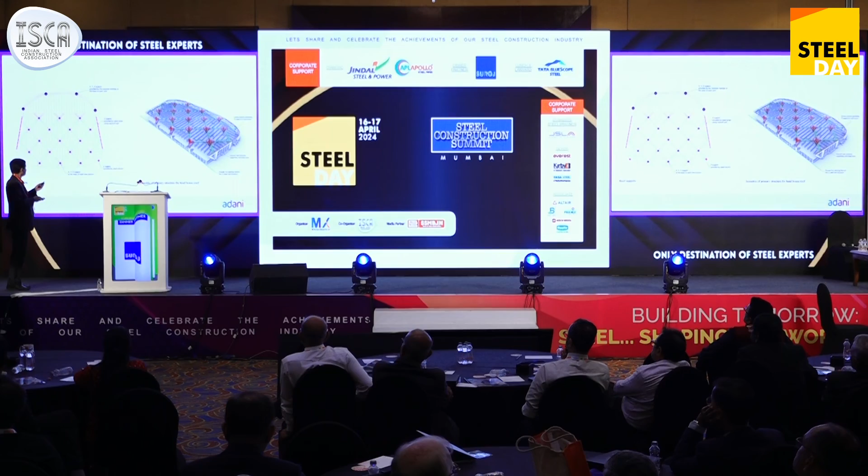Okay, so these are the columns coming from the terminal, and these trusses fly over and rest on the arches which are formed by these columns. Now as per Zaha's design, you will never know where the roof ends and where the column starts. It seamlessly turns down into columns. So these 4 arches, 3 arches, seamlessly flow down to the ground as columns to the mother earth to take the load, and they are sort of valley-shaped, finished columns.

So they take the rainwater also down along the valleys and drop them down to the gutters all around the terminal. And these columns, these trusses, this is the shape of that truss. Now this is what I called the Toblerone truss here.

The purpose behind this shape was we found out in the analysis that most of the time this truss was having downward bending. There was certain upward bending, but the compression created by upward bending reversal of wind was not as significant as the high compression caused by dead and live load and gravity loads in the top chord. So this shape was quite efficient. This section is almost equal to these 2 sections. So you can imagine the type of loading here.

Okay, this is that iconic image of the mega column that you will see when the structure is finished. This column is inspired by the lily or lotus, as you call it. When you stand here, you will be looking up as if you are looking at a lotus from below the pond. So that's the shape given by the architect.

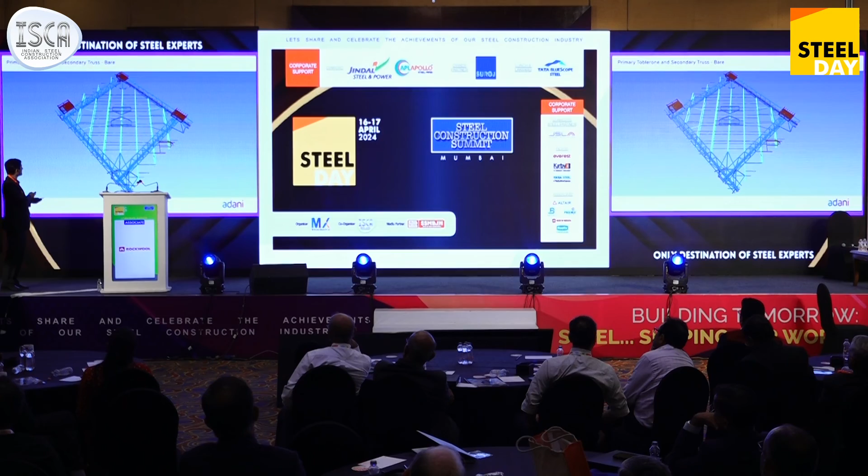This is a typical panel formed out of 4 pods plus 4 Toblerone trusses interspersed by straight, simple plain trusses and then purlins. These are some of the skylight arrangements here, but that's a secondary structure. Okay, this is that truss. Most of these trusses are made in tubular sections. These are the pods where they meet.

This is the slat ceiling arrangement. Now here the false ceiling is not opaque. It's completely permeable. There are metal slats going in twisted profiles. So with this slat ceiling, if you stand here, you can see the roof above between the slats. So all the ventilation takes place through the roof, and there are air extraction fans on top of the head of the mega columns.

Okay, so this is the interior. You can see the intricate maze of structure. This is right up to tertiary structure. These are the purlins which are given for suspending the tertiary structure of the slat ceiling, which a separate vendor will supply.

Okay, these are the arches that I was talking about. They just fall seamlessly down to the ground. So these trusses flying from the facade fly over this, rest on the arch and then cantilever out.

So this arch and this cantilever were proportioned in such a manner that the truss behind also got some relief because of the cantilever here, and this arch was not subjected to excessive torsion by its specific inclination. So Zaha, Arup and L&T did a lot of work to exactly position this arch so that it's self-stabilizing. Okay, this is that arch. And these are the massive foundations here.

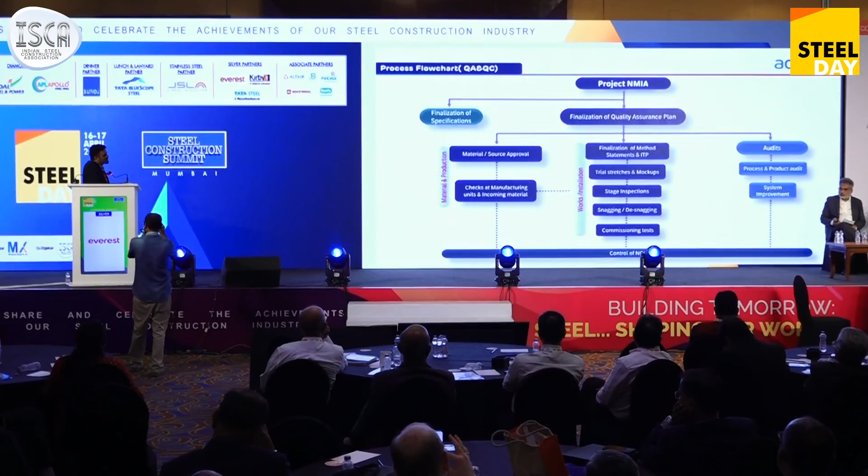Good evening, everybody. I will take you through the QAQC processes adopted for this head house roof as well as the construction sequencing. In the Navi Mumbai International Airport, for all the sub-projects we implement, we follow this process flow chart. These are basically the QAQC processes which are implemented in the various stages of the project. After finalization of the specifications, the source approval will happen for the materials. Once the materials are approved, checks will happen both at the manufacturing units as well as on the incoming material at the site.

Prior to start of any activity, method statements and inspection test plans are finalized. Then we will be having site mock-ups as well as benchmarks. Benchmark is basically the detailing of that particular member, interaction with other services and other things. So we carry both. Once those are approved, then the installation will happen for all the works. Those are monitored by the stage inspections.

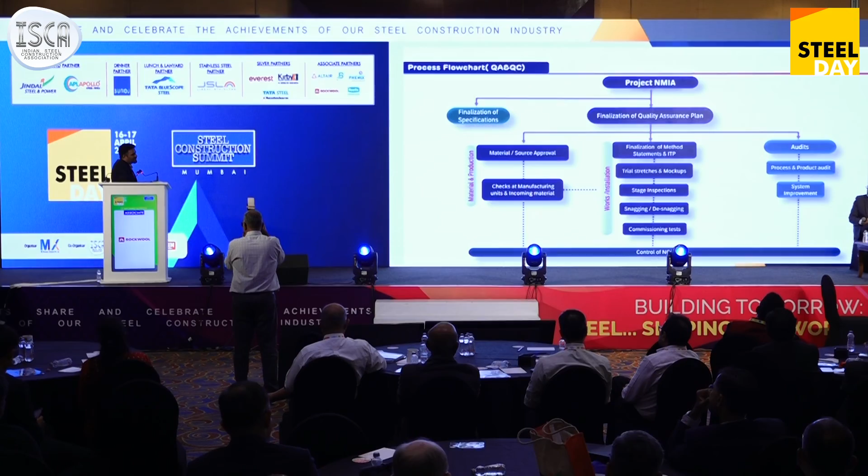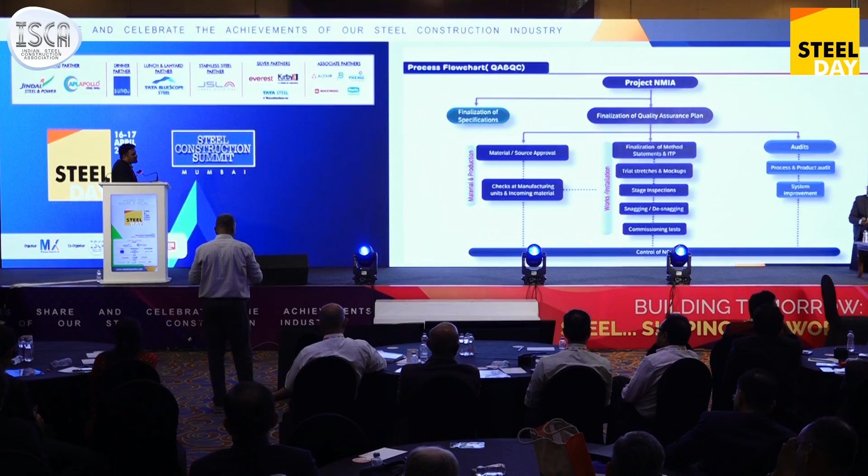Once the project is completed to the substantial stage, then snagging and desnagging will happen. After snagging and desnagging, the commissioning and decommissioning tests and all those things will happen. The effective implementation of these overall processes is monitored through the audit process, and the effective implementation and lessons learned will also be monitored through the audit learnings.

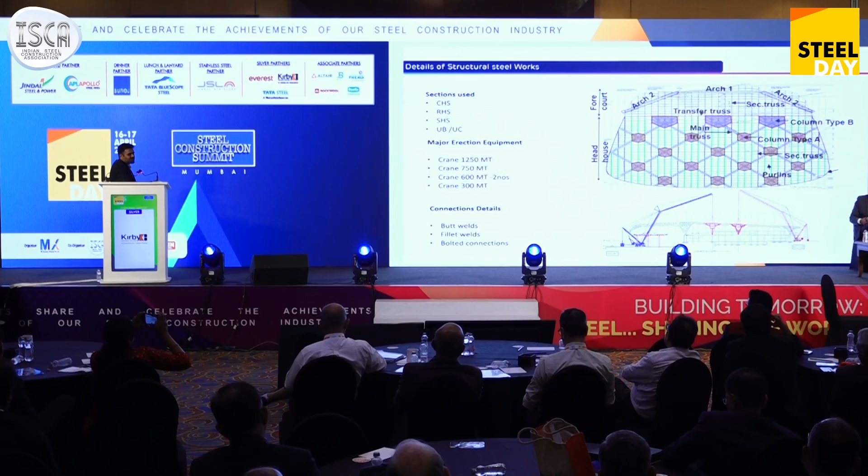Coming to a quick glimpse of this roof, the sections used are circular hollow sections, rectangular hollow sections, square hollow sections, and UB and UC. The major erection equipment used are a crane of 1,250 tons, a crane of 750 tons, two cranes of 600 tons and a 300 ton crane. 1,250 is required because of the reach required with respect to the weight of the particular component to be erected in the center of the roof. Coming to the connection details, there are welded connections, butt welds, fillet welds, as well as bolted connections.

Coming to the sequence, once the casting of foundation bolts is done, the column is erected in three segments: first segment, second segment and third segment. Once the columns are erected in three segments in a particular grid, after erection of all the columns, the main truss is erected, then a secondary truss, and then they are connected by the ties. And the final photograph is the overall view, how it looks.

Coming to the QAQC testing activities, right from the structural steel samples, those are tested in third-party laboratories before being sent for fabrication. That is the process followed. Regarding the welds, all the tension butt welds are tested by radiography testing. Other than the tension joints, butt welds are tested by UT testing. Apart from that, for fillet welds, LPT and MPT are carried out. Also DFT checking for the overall paint thickness and paint adhesion tests are carried out.

So this particular site is one of the most challenging sites in the infrastructure industry because the terminal is exactly lying on the footprint of a hill. So what we need to do is excavate the hill, and as the hill progresses backwards, the construction will start. That's how it is sequenced. So there is a scenario where the construction will happen on the site and excavation will also happen with controlled blasting.

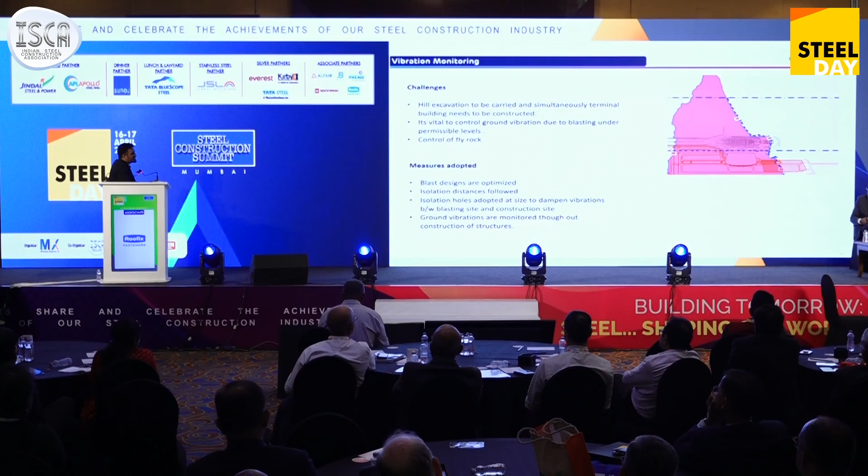So it is very important to monitor and control the vibrations for the structural safety of the RCC elements as well as grouts of the structural steel elements. So how has that been done? The blast designs are optimized so that our vibrations are within control, and isolation distances are followed. A 200-meter isolation distance is followed between the construction and the excavation, and isolation holes are adopted between the construction site and the excavation site. Those help in dampening the vibrations.

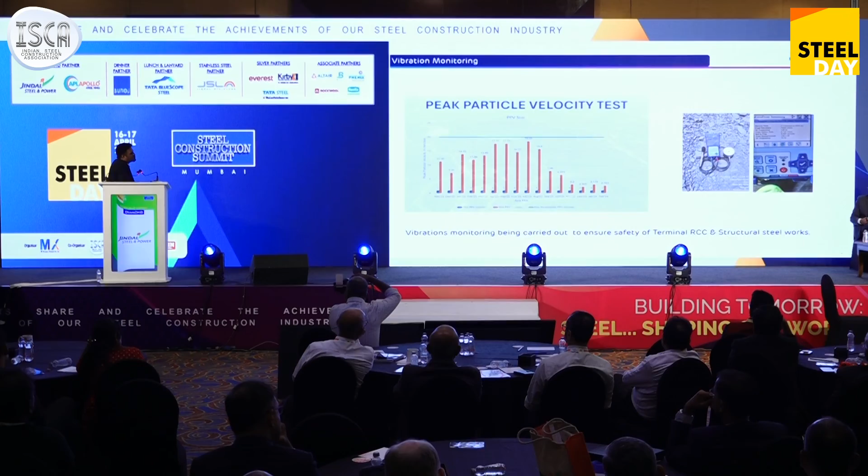As per the codal practice, we measure the vibrations with respect to peak particle velocity. The PPV allowed is 20. On a month-on-month basis those are being monitored, and they are well within those levels. What we use to monitor the PPV is a seismograph and a geophone.

Coming to another interesting issue: as I said, all the tension joints are to be tested with RT testing. At peak, the Navi Mumbai construction site had a workforce of around 5,000. For conducting an RT test, you need to evacuate the people, then do the test, and if it needs to be reshot, it needs to be evacuated again. So that was quite challenging.

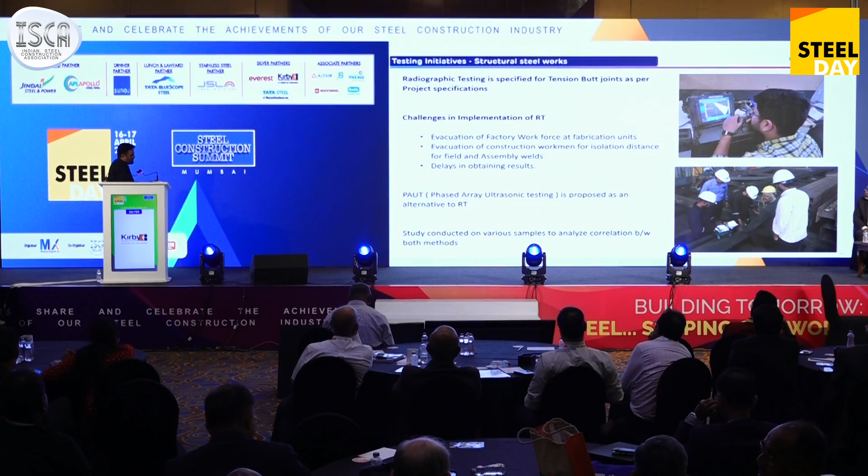So accordingly, we explored the option of an advanced ultrasonic test, phased array ultrasonic testing, and conducted a study on that testing methodology. We took different members and different joints and conducted both types of testing, RT testing and phased array ultrasonic testing. Interestingly, for all the samples of different types we selected, the results were exactly matching. So subsequently, erection butt joints are being tested with PAUT.

So these defects were purposely introduced? There was one sample where a defect was introduced, another sample which was perfect, and others were regular joints. Simulation and study were carried out for both cases, and the results were found to be exactly matching.

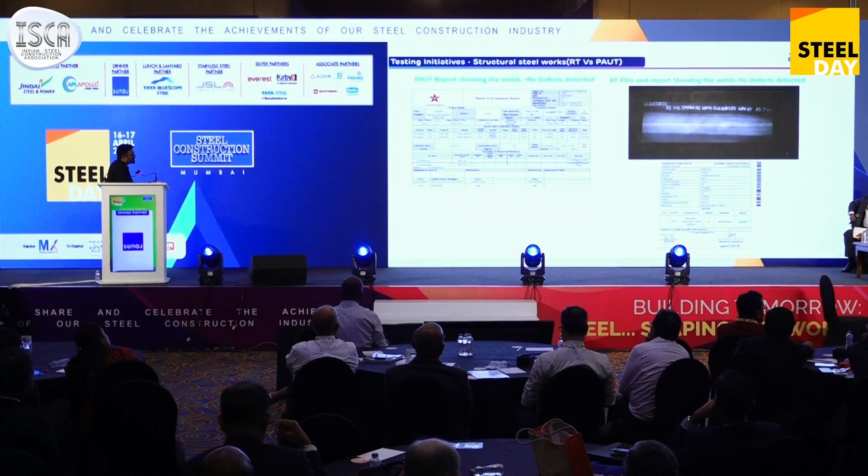Also, one limitation of the earlier ultrasonic testing is that it is left to the operator to analyze, and we won't have any documented record. Whereas PAUT has a recording device where you can store the data and access it at a later date as well. Right. These are the comparison reports, conducted by a third-party expert agency. So these are the merits.

Another challenging aspect we faced at that site: at the erection site, at peak, we used to have around 60 to 100 welders, and their welder qualifications are different. Some are qualified for 6G, some for a different position. So tracking exactly which welder was doing a particular joint was quite challenging when there is misplacement of ID cards or such things.

So we introduced a QR code system, where a code is pasted on top of the PPE of that particular welder. Anybody who walks over the site can scan it with a mobile and get complete details of the welder and what position he is qualified for. Those measures have been introduced, with which the inspection engineers can easily cross-check the welders deployed.

I think that should be emulated by all of us, the welder qualifications by QR code. It's a very nice idea. That's right. And anybody can go and scan. So traceability is there, and it will help the system run.

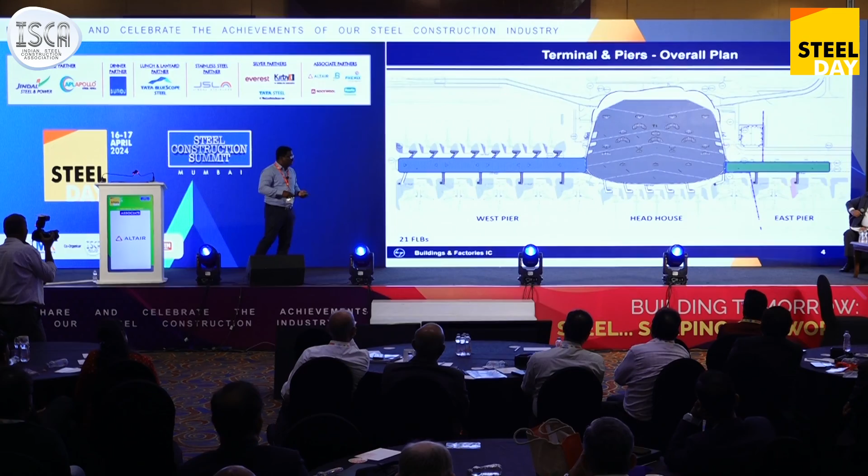We have the head house and it has got 2 parts. First part is the head house, and from here we have a facade which will be separating the external and internal areas. This is called the forecourt, where the arches we have already explained. Then we have the east pier, which is relatively smaller, 4,500 square meters, this is 5,500, and this is 14,500 square meters, the west pier. We have 21 FLBs. From the FLBs, passenger boarding bridges are there, but that's a vendor supply item. So we have designed these systems and I'll be focusing mostly on the structural steel system.

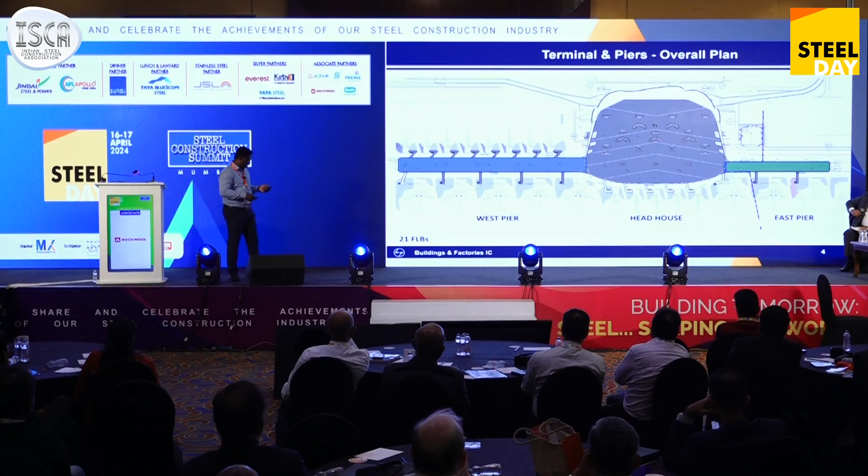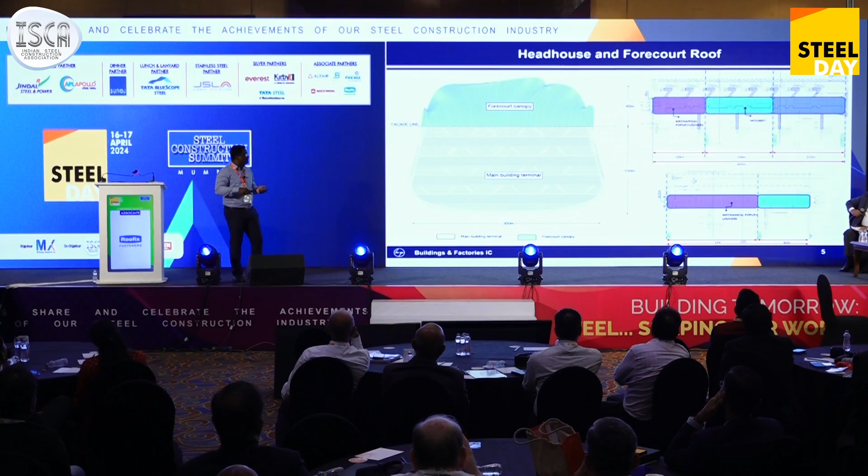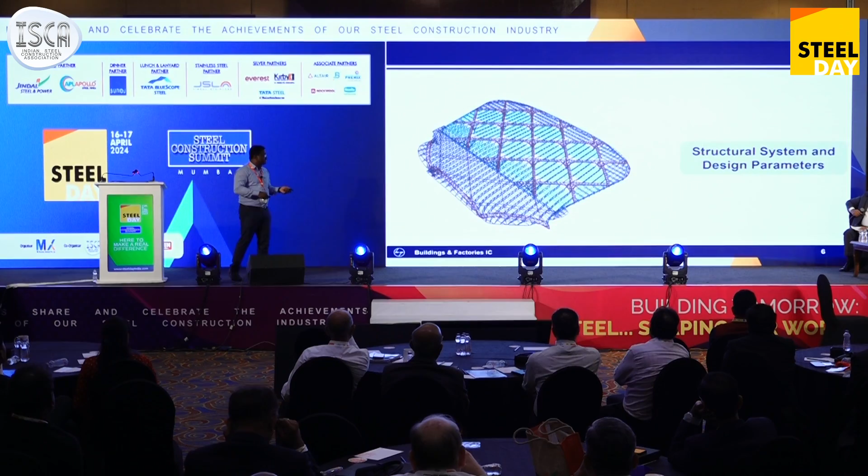There are edge trusses which support a bull nose system. I'll show some section of that, which carries the services, downtake pipes and catwalk walkways inside for services. And it's all in a single envelope. And on these 2 sides we have earmuff structures. I'll show some cross section of that as well.

Now, coming to the system, here you can see these are cantilever trusses which come from the primary truss, which support the edge trusses. And as he said, we have 2 small size columns, 550 dia columns, which make this from a cantilever to simply supported at this end. These are called transverse, which support the trusses from secondary trusses on the forecourt side. Now, these arches are also uniquely designed. They have a torsion or twisted shape along the length itself, which balances actually.

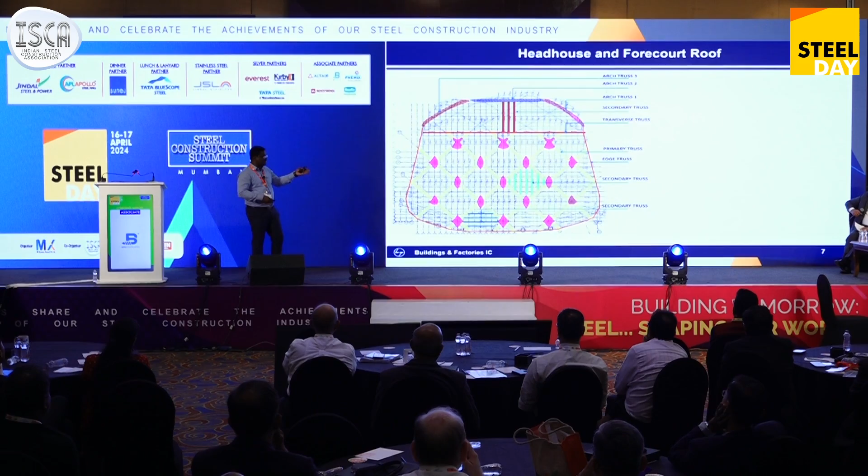Yes, and moreover, the spans are so high. The grid dimension is 50, as he has also explained. Your column dimension on the top is 22, which brings down your primary truss effective span to only 32 meters. So this truss is optimally sized for that 32 meters.

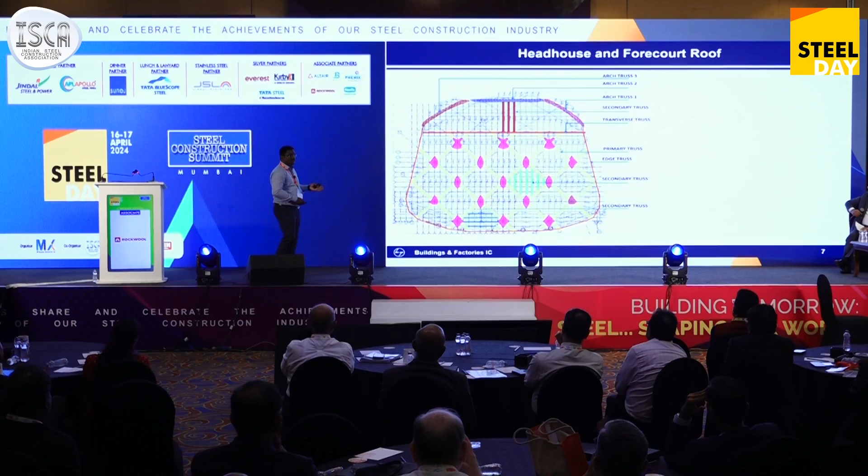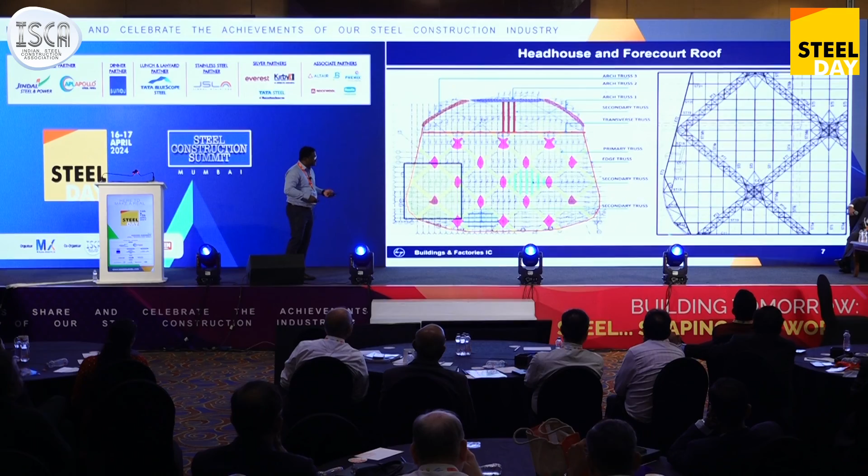If I bring in a big cantilever here, the design will go wrong, or rather it will not fit into the conceptual system. So just to show a system, this is the triangulated primary trusses, secondary trusses, ties, edge trusses, all these are just shown. Yeah. Now coming to, these are standard things.

350 grade is mostly, 99% is 350 grade; only for small connections or something we used 250 grade. Mostly IS codes. And coming to the connection design, since we are using IDEA StatiCa and we have to go to the plastic stage, we had to use Eurocode for the limiting plastic strains majorly. Then STAAD Connect Advanced is used because the model is so huge, and IDEA StatiCa for most of the connections. And these are the temperature loads based on the study we have got, and that's incorporated.

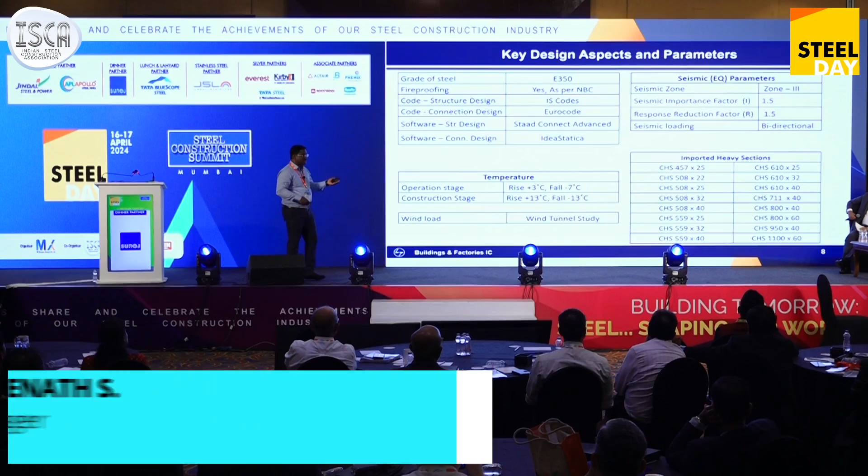And wind load, we have done a wind tunnel study, and based on that we have considered the wind load for the structure as well as the facade system, everything. So that I'll go into a little detail a few slides later. And coming to the seismic, the different thing is normally we'll go for ductile detailing as per section 12.

Here the difficulty is, it's a portal system. The portal system is made of a column which is a truss as such, or it's an articulated system. Then the beam is again a triangulated truss system. So it's difficult to predict where the plasticity will happen. So we have to go for a rigid system. So NBC has this clause: you can use an R value of 1.5 to design the system as rigid as possible, and then go as per the requirement.

Then, in any case, with such rigid frames, except for probably the base level, there would not be any plastic hinge formation. Correct. With such a rigid diaphragm action at the top. So it was safe to take R equal to 1.5 rather than R equal to 3 or 4. And in any case, most of the places wind was governing, so it didn't really matter. We have a pin-based idealization as well.

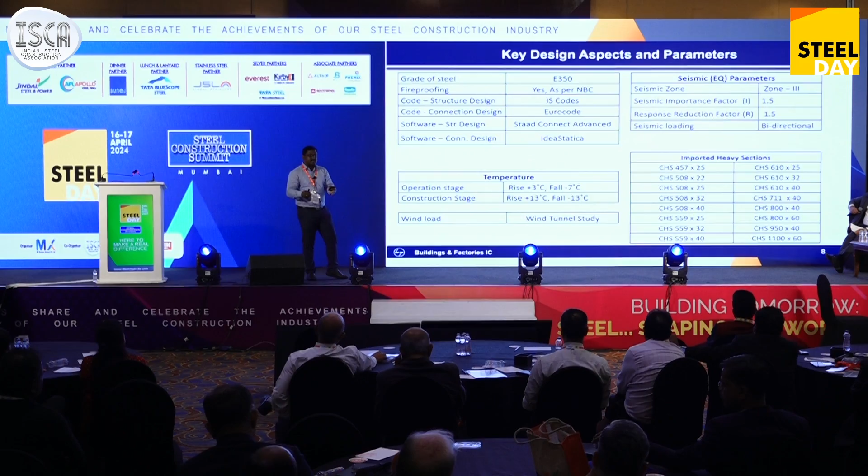Another point is bidirectional, which generally we don't use. We have a concrete system with an orthogonal, rectangular system, and this is 45 degrees to that. He has already explained. So we have a combined system, where we cannot put a normal seismic in X and Z with that. So we have considered seismic in one direction plus 30% of seismic in another direction. We had complexity in bringing out the forces for connection design, but we had to do it that way for the connection design in IDEA StatiCa.

Now, because of the complexity of the size, the spans, we have gone up to 1100 by 60 thick. And in the previous panel discussion it was discussed, we had to import; it's not pride, but unfortunately we do not have it. I think many of our manufacturers are now coming up with bigger sections. We have gone up to 60 thick. So here also it was just rolled and brought from there. Many of the other sections below 25, 20, 16 and all we got from India, from different vendors.

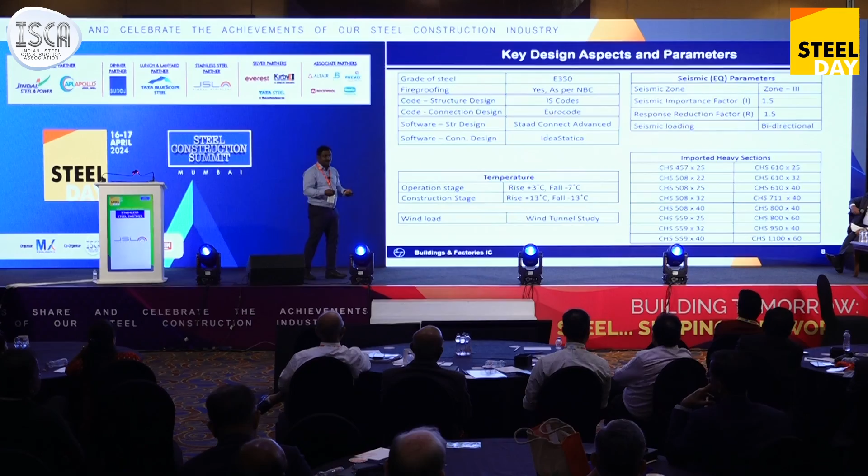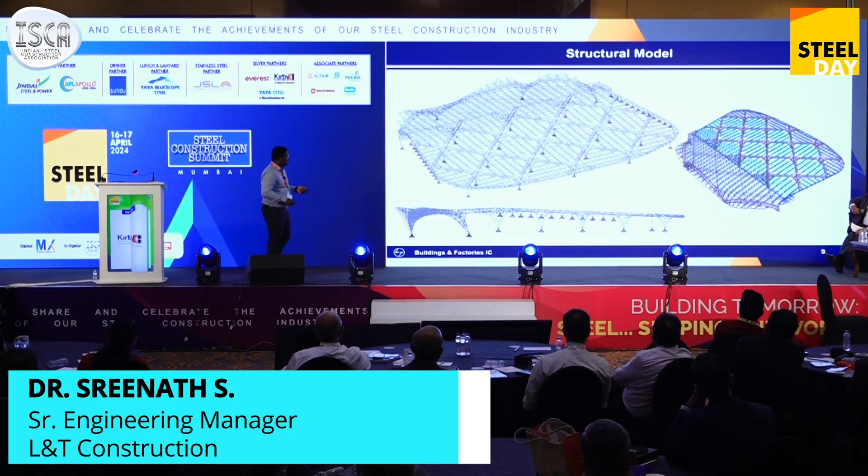Now, this is a structural steel model, just to get a glimpse. All the supports are pin supports, you can see, and these are those pencil columns we are talking about. Next. Now, as I said, from the interface region or the facade which separates the head house and forecourt, it slopes down. So we can see the column height varies from approximately 21 to 14.6 meters. The configuration remains the same. And this single column weighs around 125 tons.

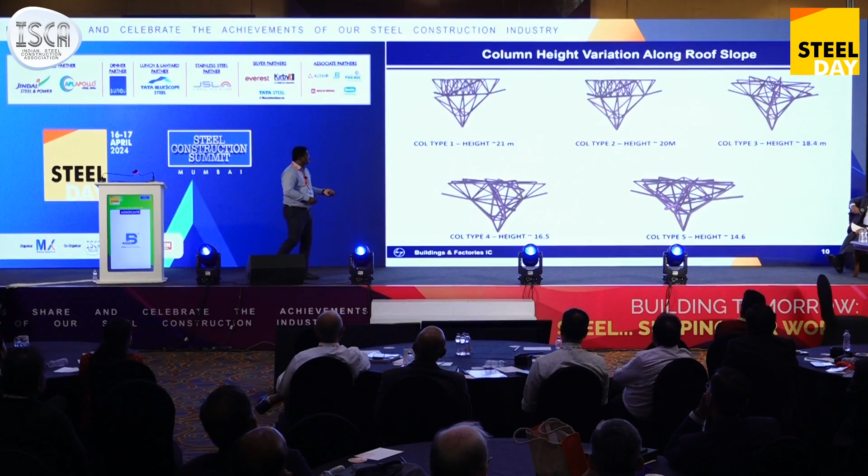These images, because of the screen size, are a little unclear. In the initial design, it's just point-to-point connection when you do the structural design. But when it goes to the connections, it's complex. It is time-consuming to bring out all the profile cuts, and matching the profile is very difficult at execution. So we have proposed connections made of plates, box nodes, or different shapes, depending on the number of elements.

Here you can see that we have only 2 plus 3, 5 members connecting. From 1 member it goes to 5. From that 5 it goes here, where it will have more members. So we have up to 13-member connections. I'll come to the connections later. This is a typical primary truss. We can see that at these nodes we have bigger diameters and bigger thicknesses to accommodate the trusses at that location, or for strains to be within the limit.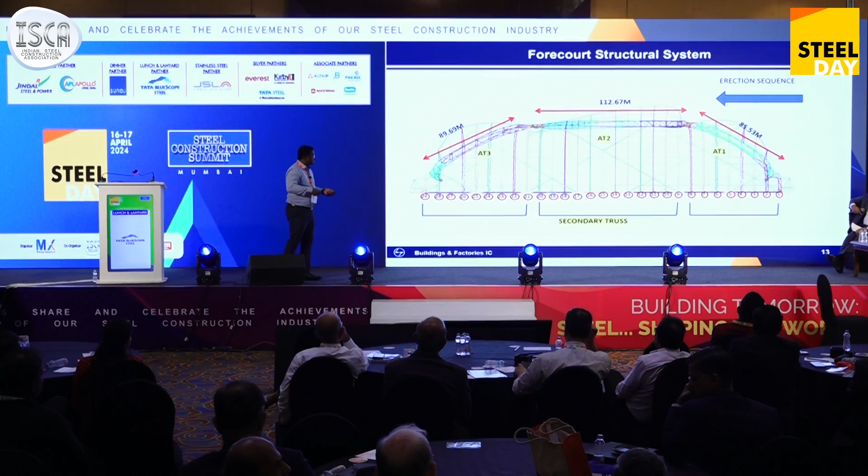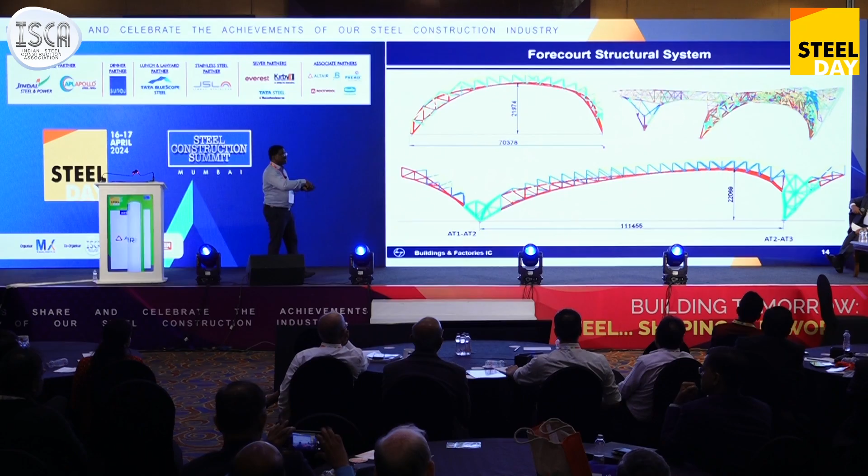Secondary trusses are at every 9 meters, which is the standard we have used in this project. Now, the heights of these trusses also vary, 22, 21, and I've shown only 2 numbers. This is the largest truss. This erection is yet to happen. Whatever is the done part is the head house portion.

Now, coming to the base idealization, it is pinned, but even then it is designed for some minimum eccentricity and bolts are provided. For that, we have provided a shear key. So there is a shear key below which takes care of the shear. Majorly it's shear only, as per the output it's only shear. But we put the shear key and then we are designing anchor bolts for some moment.

So you can see different connection configurations or box nodes which is used to connect multiple number of elements joining at that. These are the plastic stresses which go up to theoretical value, code given value 350 by 1.1, that is 318. And plastic strain is maximum limited to 5%.

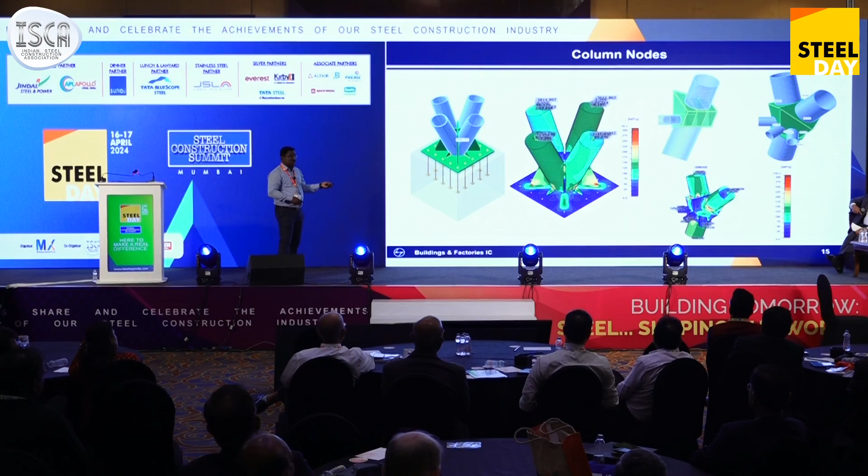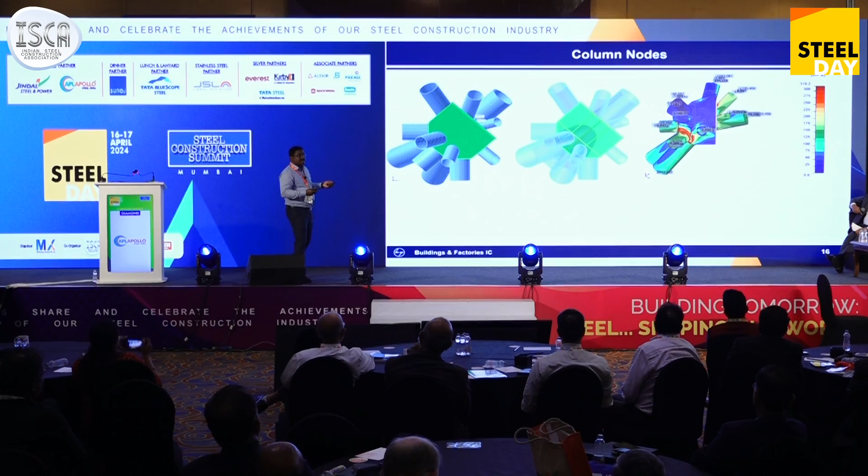Now these are some others, we can see the number of elements connecting because of this geometry, the number of sections joining we have to use. We have multiple stiffeners, ensuring that we are not depending on the plate bending. We have a stiffened system available there.

This is again coming to the primary truss interface, or column just goes and receives the primary truss. So we have different flange connections, welded and bolted connections, different types of connections are used for this.

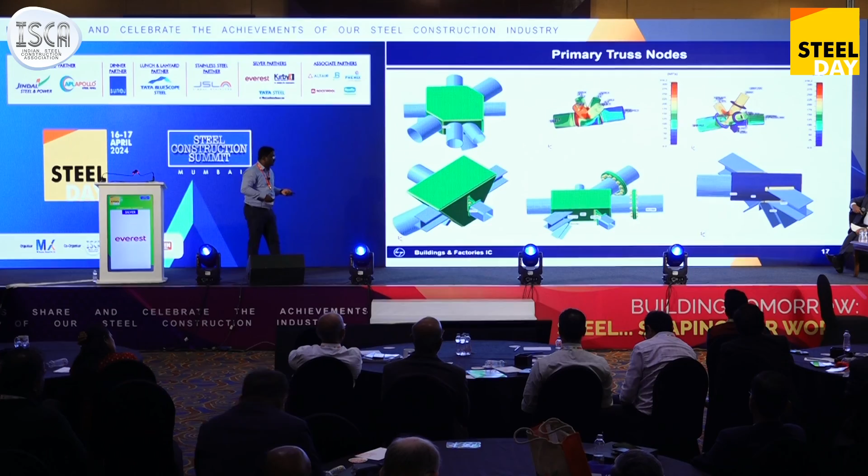Now these are varying heights. I'll just run through different heights of facade mullions we have because of the shape and interface with the column. So these are the 3 mega columns. The head house and forecourt, it combinedly supports.

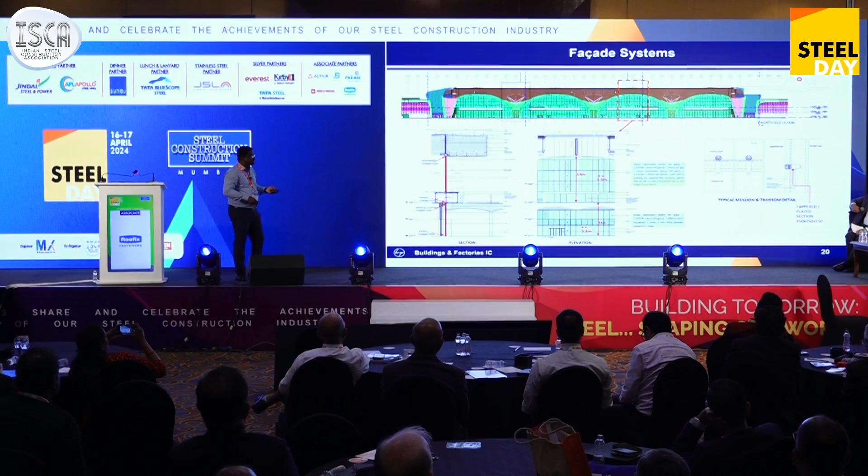And here you can see that the mullions are not rectangular. We have a tapered section which is used for the mullions. And this is column cladding, front side column cladding, which will have an outward projection which starts from the lower level. This is the departure level. So it's a combined system for both columns from bottom to the top.

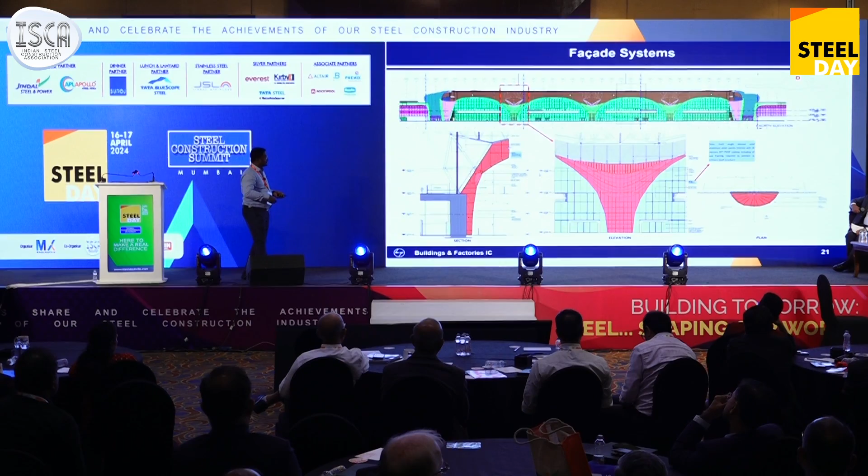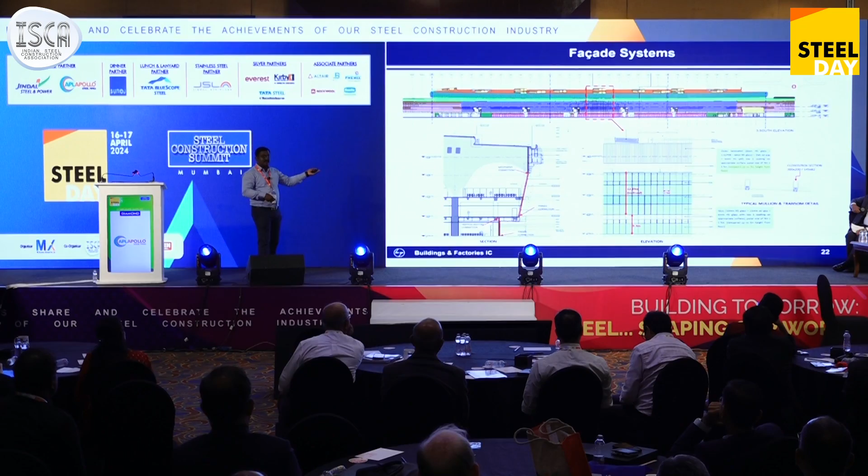Head house south side, which is the air side of the structure, air side of the airport, we have a slanting mullion where the connection detail, all facade connection detail, is shown wherein you will not transfer any vertical load or movement to the facade mullions. This is also the same, yeah, this is what I was saying.

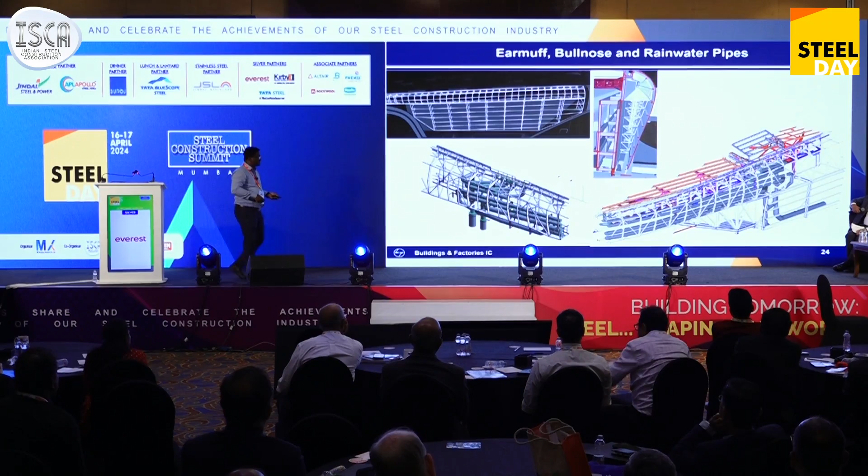You have a catwalk. This is the concept design stage details where you have some catwalks, pipes, everything is running there. You can see the complexity of the systems there with so many pipes. It's designed for 100-year rain, and over that some additional 2 times cushion. Some cushion is there because there should not be any problem whatever rain happens.

So we have up to 700 dia pipe, multiple 6 pipes are there coming from different gutters on rooftop, for 100 years worst rainfall and 2 times the redundancy. So every drain has got 2 pipes, one backup like that.

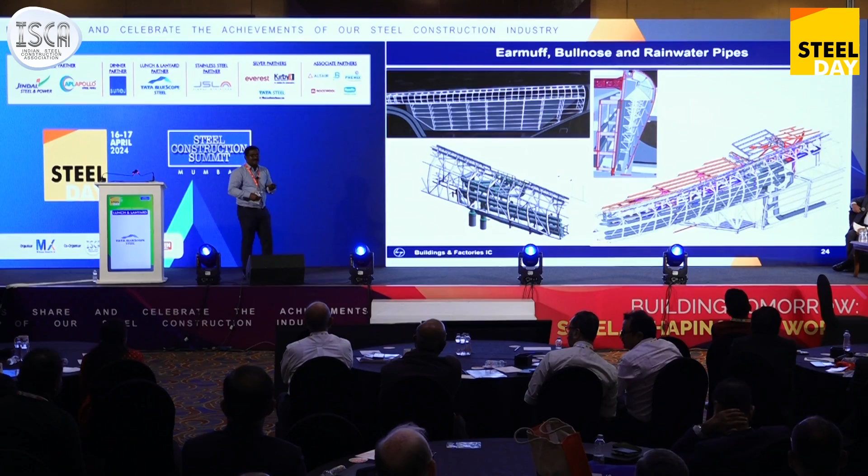This is the close-up view of the model. We have multiple sensors in that. I'm not getting into the details of that. We are getting input from them for the different transducer locations. They will process and give the data, wind tunnel data.

Now, when it comes to the second phase and third phase, you're going to have a system where there will be interference of wind acting on the structure from other structures. That part is also taken care of in the current design itself. We've accounted for that, and the incorporated design wind pressure values are considered for the design.

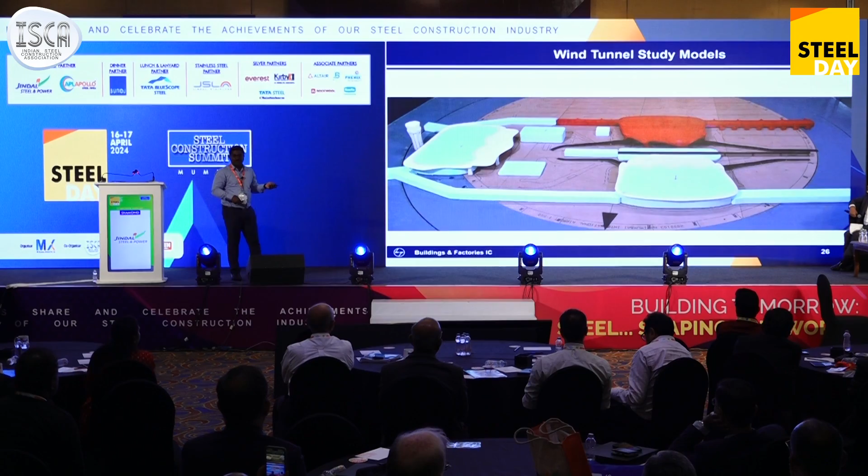That wind pressure values we have taken into grid sizes, and this is one case I'm showing. Unlike as per the code, if you go for almost a 5-degree or 2.5-degree slope, you don't expect a wind load downward. But in this case, we are given a wind load downward, which is not conventional. We had roughly 50 kg downward load all over the roof acting on dead, live, plus everything, despite less than 10-degree slope.

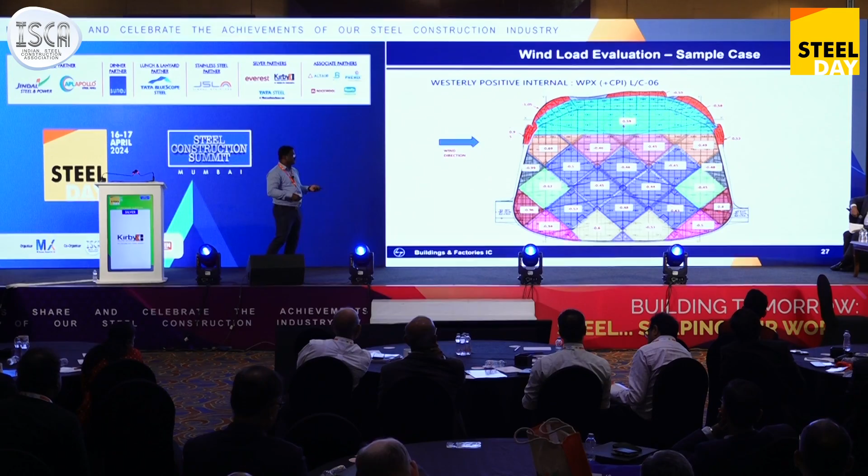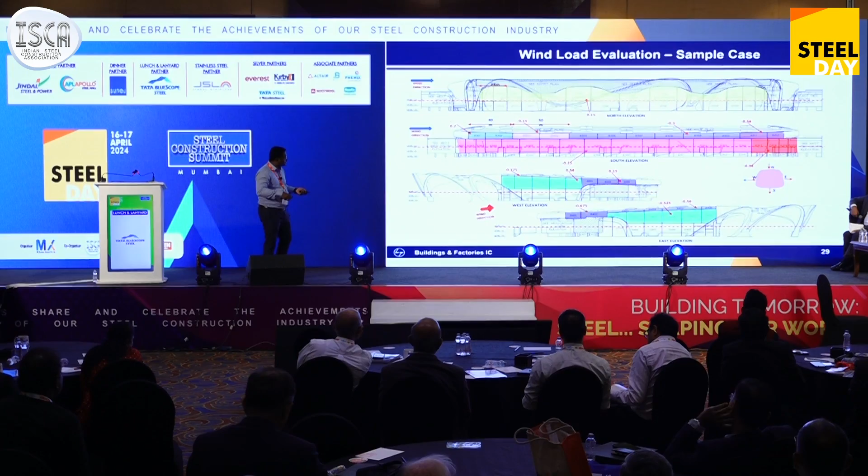It's only 5% slope. There are all different cases, and we have so many segments because of the shape, so the wind tunnel data is given for many segments. This is also for the forecourt portion, processed and given in detail. Even for the facade portions, different regions like the bullnose portion, and for the claddings, different segments have wind tunnel data given accordingly, considered in the design. It was a laborious exercise to bring that into the design model.

The workshop is 90 kilometers away, in Wada. The highest piece transported or lifted was 124 tons, done as a single lift.